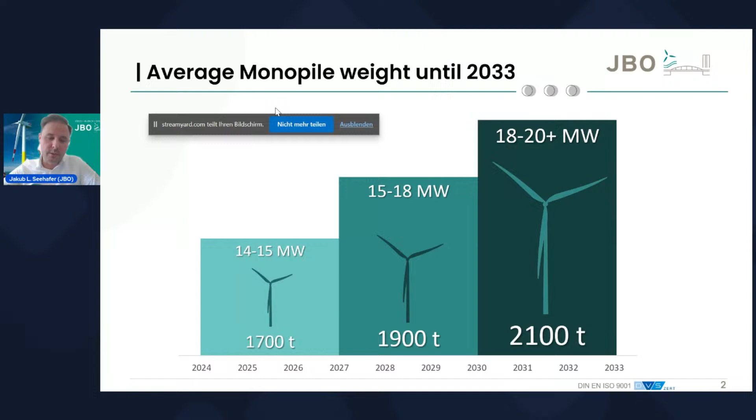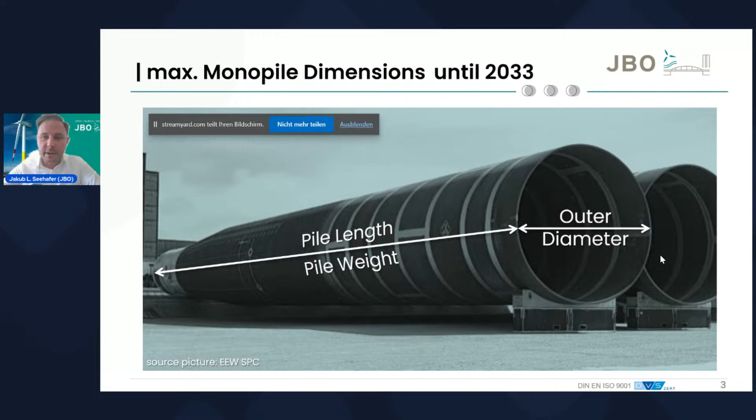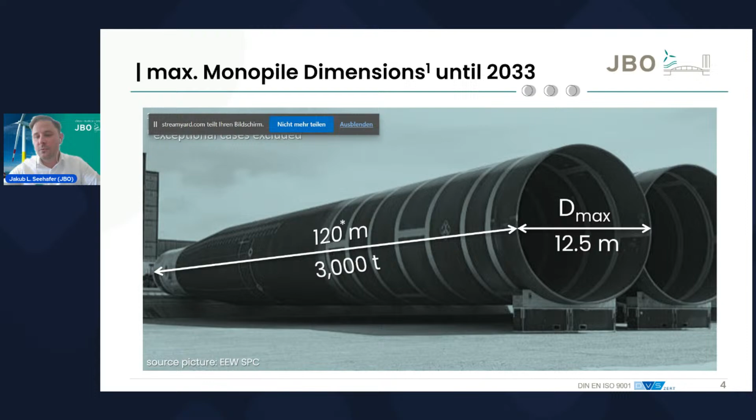When talking about the maximum monopile dimensions and figures, we should concentrate on three of them: the maximum outer diameter, the pile weight, and the pile length that we expect to reach until 2033. These are the values that we at JBO see: a maximum outer diameter of 12.5 meters, a maximum weight of up to 3,000 tons, and a maximum length of 120 meters that we expect to observe and reach by 2033. So far for the dimensions.

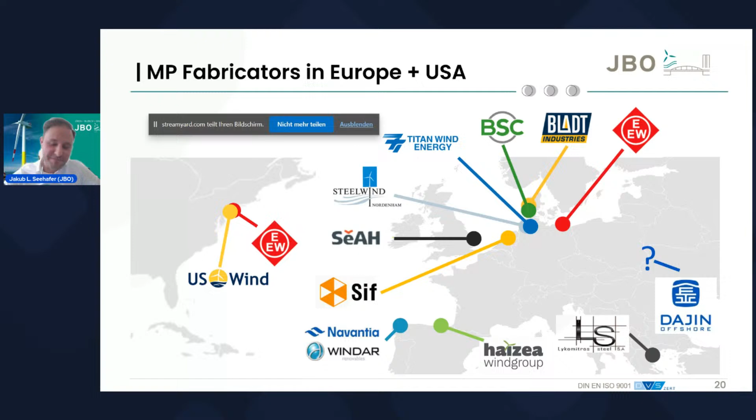Something that we at JBO have considered here is the average weight for the output of those foundations. As the fabricators usually give out their fabrication capacity in steel ton per year, and as we are here dealing with the output rate of monopiles per year, we have specifically for each and every year considered the average monopile weight that we expect to reach.

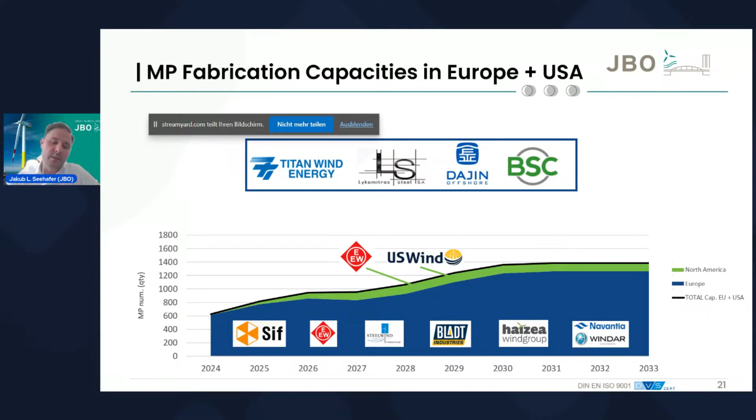So if we would have not done that, the capacity curve would be even higher, which we do not see as realistic when considering this average weight of monopile foundations. In other words, the heavier the monopile average weight becomes, the less the output rate at the fabricator. And this has been considered here in the study already.

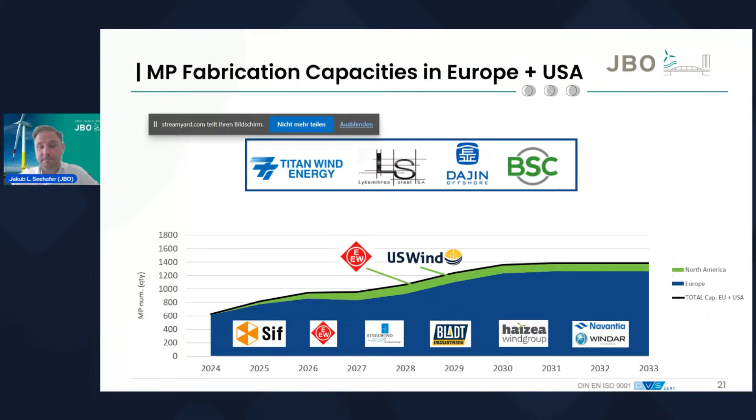Now, you're curious about the capacity versus demand curve. This is something I was also excited about to see, and this is the result.

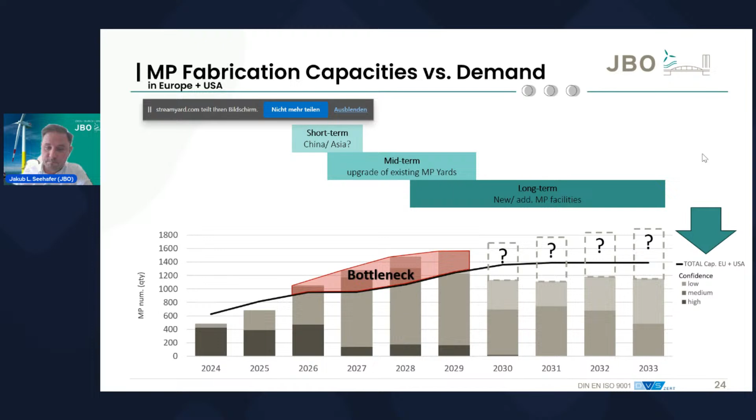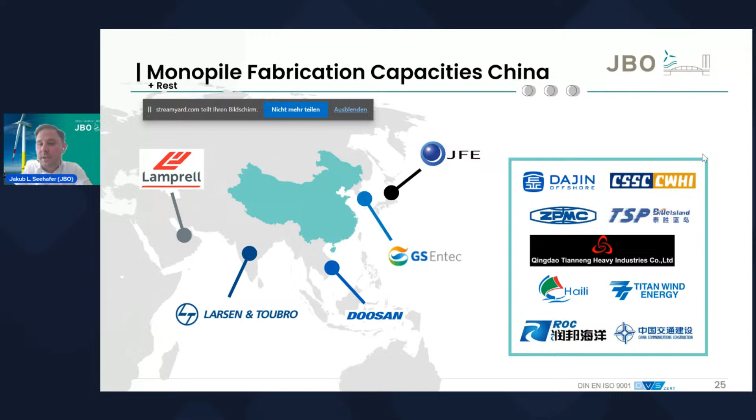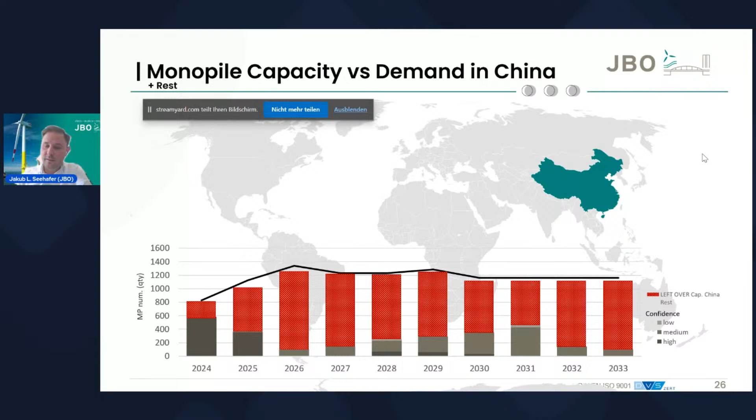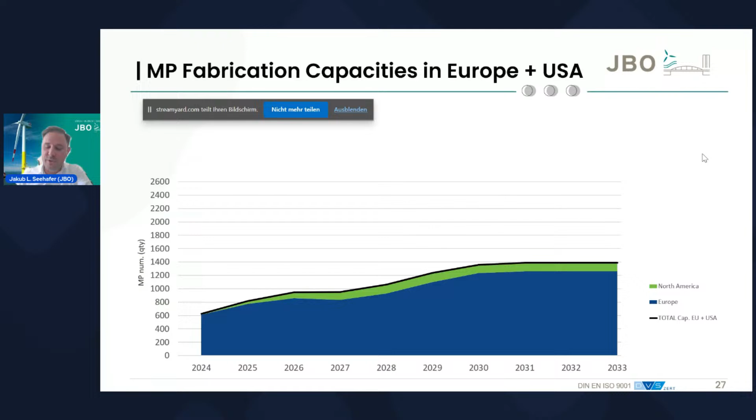Now you're curious how this diagram would then look covering the European and US American capacity, and adding the export capacity, the potential export capacity of China and the Far East fabricators. Now, this is how this diagram would then look. Since the gaps are different specifically for each year, this diagram looks, let's say, different.

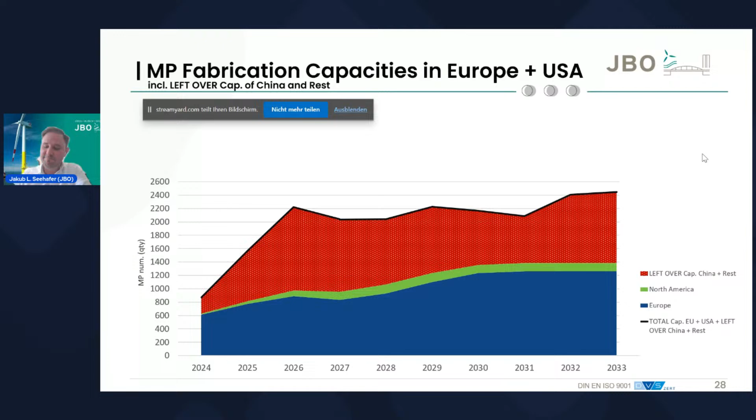Now, if we put this maximum trend line onto our demands for fabrication worldwide, except for China, considering the export capacity of China, we can clearly identify that we have mitigated the bottleneck that we identified before when not considering the fabrication capacity in the Far East, even if we consider a higher demand for fabrication from 2030 on.

This is the kind of conclusion that we can draw from this slide. My recommendation to the market is important, actually. What I really recommend is to be on time. All these values, all these characteristics of this diagram, cover and consider the current and past press releases of the fabricators.

So if there is one in the audience, please be on time. Please make sure that your capacity will be available to the market, because the market obviously needs you.

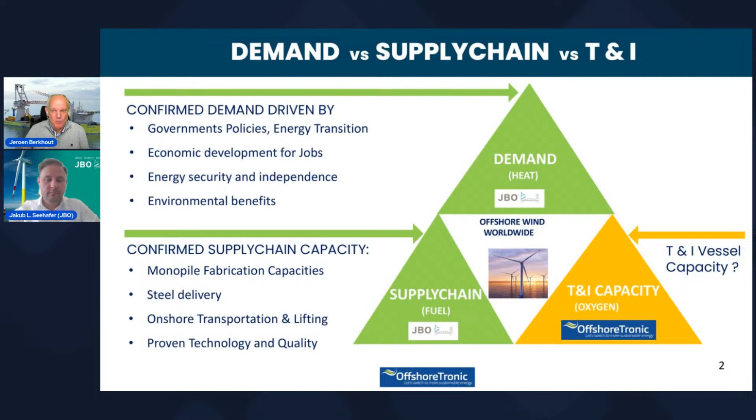Today we'll go and have a look on the right side, bottom end—that's the transport and installation capacity, to see how we are in that area. And you will probably be a little bit surprised, and hopefully people won't get shocked.

Before we start to dive into all the numbers, we want to highlight that we have tried to come up with a really transparent outlook. To come up with this transparent outlook, we used a lot of data available privately and publicly, and we have tried to verify this as well. So in the bottom line we've put whether it's a prediction or an assumption, we will highlight it.

What's important to highlight now is that we are looking only at the European, US, and Asian markets, excluding China, because the vessels from China—we don't believe they will be entering other markets. So for now, we have excluded China in this report.

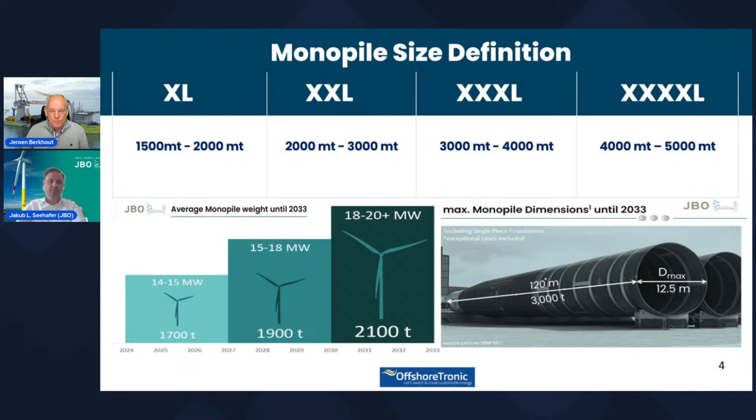What type of vessels are used? Right now we see four types of vessels assigned to offshore installation. First, the monohull vessels. Right now four units are in operation, and we see that as the most efficient T&I solution on the market. There are some more vessels from oil and gas, but we don't see them as really compatible for the larger monopiles, and they're also not operating as such right now.

Jackup vessels are filling in a bit of a gap left over by the monohull units. So some operators with these large jackup vessels have equipped them with mission equipment to install monopiles.

Right now there's also a semi-submersible unit that's been converted for the installation of monopiles. These vessels are extremely costly to operate and run, with high fuel consumption, but as there is a shortage of vessels, this operator has stepped in and is offering their vessel for monopile installation as well.

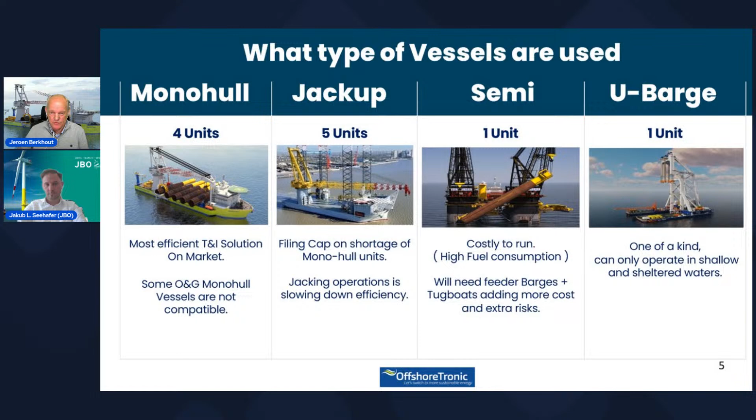Another vessel that's a bit one of a kind is the U-barge. The name of the vessel is Svanen, from Van Oord in the Netherlands. It's a vessel that can operate in shallow and sheltered waters. We included it because the vessel is getting a large upgrade right now, so we took it into the report as well.

If we look at the overview of the vessels operating, and maybe we missed one, let us know, but we believe we have a good overview. We know one monohull vessel operating in Taiwan is not on the list, because that vessel cannot safely operate with monopiles bigger than 1,500 tons. That's why it's not shown on this graph.

Right now we see four monohull vessels operating: two in the US and two in Europe. Shortly, one of the jackups is also going to operate in Taiwan, and that's the Blue Wind. There are some other jackup vessels operating with smaller monopiles below 1,500 tons, but we didn't take them into account because they will be phased out very quickly.

In the coming years there are also some new building vessels, mainly jackups, coming to market, and it's very difficult to pinpoint exactly when they're coming, because there's always a risk of delivery delay with the shipyards, transit time from China, and installation of the mission equipment can take some additional delay. But we have listed them down here.

If we go to the right, in 2027 we have one vessel, a monohull vessel, that is a project under the umbrella of OffshoreTronic. We are the project developers for that vessel, but it's still to be confirmed if this vessel will actually come. It is prepared though, and it could be an option to get that vessel online in 2027. It's a conversion, not a new build vessel, so there's a shorter lead time. Hopefully we can get that online in 2027.

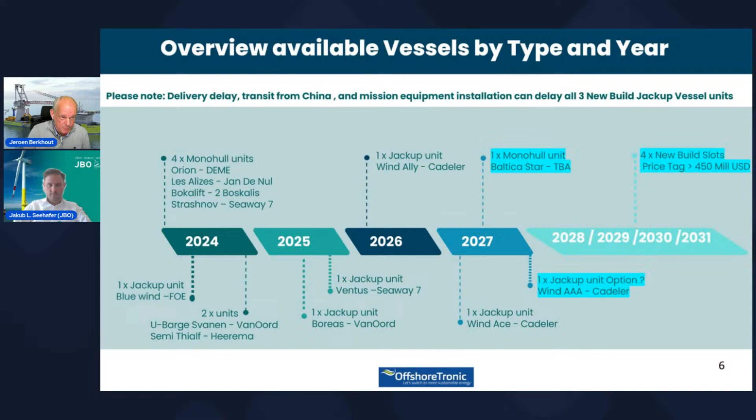There's also an option for an additional jackup vessel shown here. It's not clear if this option will be executed, but we put it on the list as well. And then there are new building slots mainly in China, but the price tags are extremely high, and so far we haven't seen any confirmation that somebody is ordering a new vessel.

The next slide gives a bit of an overview of all the vessels, and we have given the vessels a competitive score as well. This score is based mainly on efficiency, capacity, emissions, day rates, and the safety risk of these vessels. If you score 100%, you have one of the best vessels on the market, basically the best vessel that we see.

Some vessels are a little bit lower in score, and that has to do with the day rate or the emissions, and also the capabilities of the vessel and the amount of monopiles they can transport. On the right side of this slide, we have a number, and that's the optimum monopile per year number that this vessel can produce or install.

That's a number we see if the vessel is doing a normal season without too many operational issues, downtime, or maintenance periods, but also considering mobilization from Europe to the US or vice versa. It's an optimum number that could be 10% higher or lower, but it's what we feel should be optimum for that vessel to install the amount of monopiles. This is a competitive score for monopiles between 1500 and 2000.

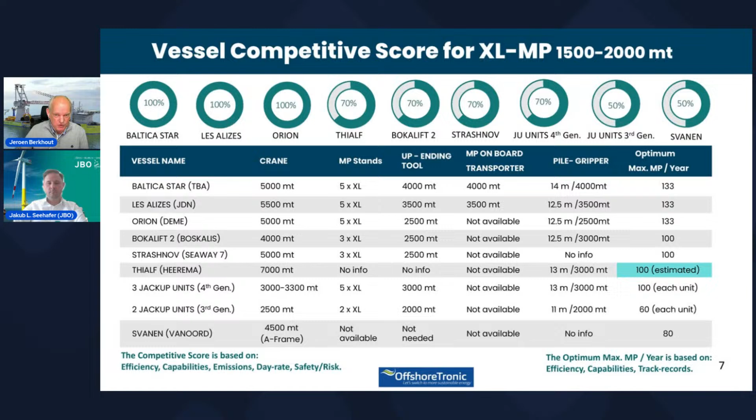You can see also in the first slide we had 5 jackups. Let me go back quickly. Here we have 5 jackups, but the 2 smaller jackups from the second or third generation only have a maximum installation capacity of 2000. So in the next slide, as we go back to the 2000, 3000, the dual XL monopiles, you can see that they are already obsolete for installing these larger monopiles.

We also have a new vessel on the market with no track record - the Thialf from the company Heerema from the Netherlands. That's the large semi-submersible vessel that will start installing monopiles this year. We have no track record of that vessel yet, and it depends on how their operations go. The vessel will be operating on its own offshore, with feeder barges and tugboats bringing the monopiles offshore. But we estimate more or less 100 monopiles in one season if everything goes well.

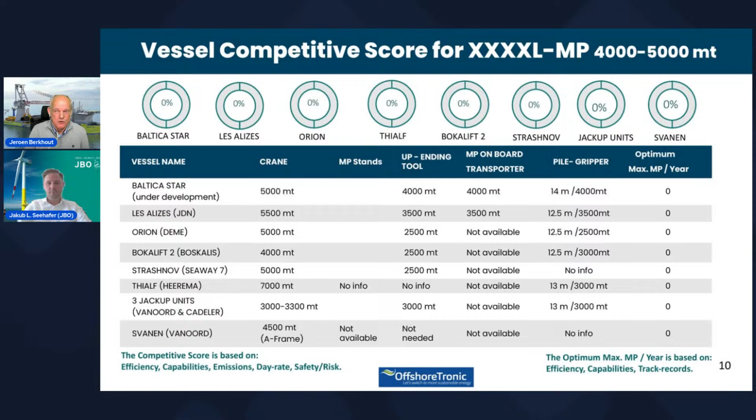Let me go quickly to the next one - that's the quadruple. We don't see any requirements in this area yet. There are some rumors in Taiwan that they're looking at monopiles over 4,000, but this is a very niche market, and it's also probably very difficult to produce. We heard some rumors that in China they may be able to build these monopiles, but so far there is no real evidence or information we can refer to.

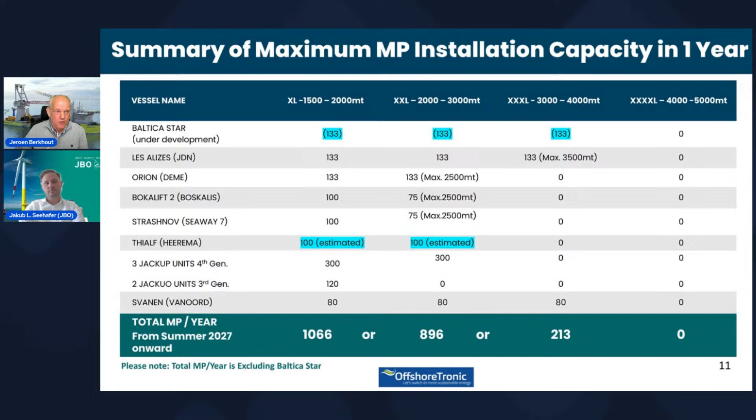If we make a summary of the last 4 slides, we can see a number per year that those vessels can install, divided into the XL monopiles, dual XL, triple XL, and quadruple. You need to understand - and I hope everybody understands what we put on the slide - that if vessels are operating in one segment, they cannot of course operate at the same time in another segment.

So now we come to the numbers. We get a lot of numbers here on this screen, but there's no need to look at this closely because we made a nice graph. This is just an overview - at the top you can see in green the optimum capacity of monopile installation for vessels in the different segments. Then we see the numbers from JBO, the confident market demands, and the total of that. We've also taken the total fabrication from the JBO report, and then we can draw some conclusions.

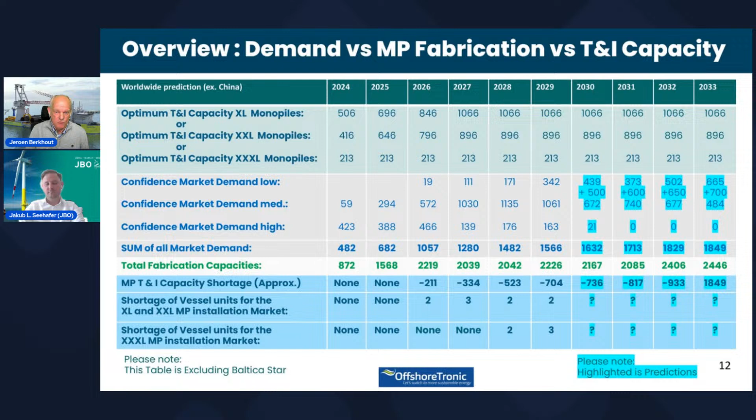And then we see in the blue highlighted boxes underneath in the columns, the numbers in 2026, 2027, we get a shortage of vessels. It's better maybe we jump to this chart that gives a better overview.

So to explain the lines, we have the top line, that's the fabrication capabilities from Europe, Asia, and US, plus the leftovers from China. We also have the line for wind turbine generators, multiplied by 10 kilowatt. So when the output of the turbines goes up, the size of the turbine requires bigger foundations. These are the lines we've taken from the report from JBO. And the yellow line is the vessels that are available.

And then at the bottom we have put the numbers, so you can see clearly already from 2026 there is a shortage. It's also interesting to highlight that the red line was given as the bottleneck, and that's the fabrication between Europe, Asia, and US.

And what we understand also from Jakub, from some discussions, is that monopiles basically from China will be transported and used in Europe, and some monopiles fabricated in Europe are going to the US area. So there's a lot of demand on the heavy lift transport vessels to cope with all this transport.

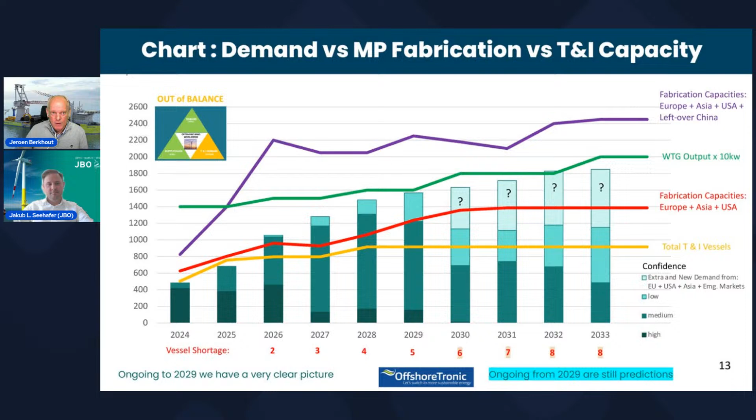Right now we are installing wind turbines between 14 and 15 megawatts, but slowly we will go to 18, 20, 22, 24. So we made a scenario and a prediction on the worst case, what can happen with the evolution of the wind turbine. That will also affect the monopile, especially monopile weight in combination with deeper water.

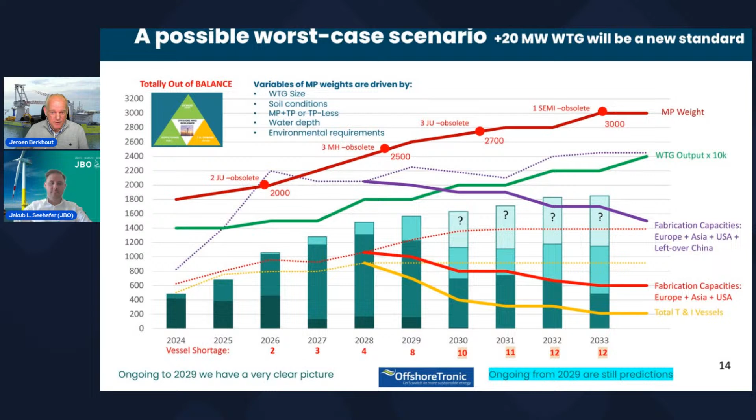You can watch it. So this worst case scenario could also have a huge snowball effect in the whole industry. And we have given here some examples of what can initiate this snowball, such as insufficient monopile installation vessels. These are not very remote examples; they are examples that are coming in the next 3 or 4 years.

If you have a monopile with a separate transition piece, we already see in projects around 60-70 meters water depth, the monopile will be above 2,700 tonnes. So there are quite a lot of vessels that are not able to cope with this.

We also see an example of a TP-less monopile for a 15 megawatt wind turbine in 50+ meter water, and that's already giving problems and headaches for some contractors. There's also a situation with a monopile of 2,500 tonnes for an 18 megawatt turbine that is in the planning.

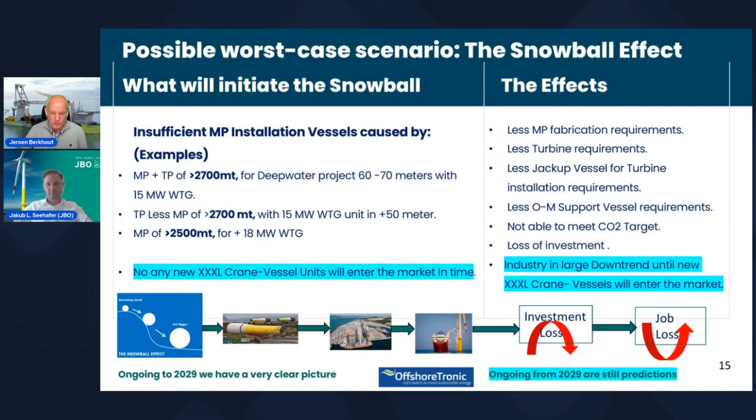So at the bottom we have made a small animation showing that the snowball will start with the foundations being key, and in combination with the vessels, it will have a snowball effect on the rest of the industry. The challenges -

What can increase the vessel demand? We have a good overview of what we have and what the capabilities are of the vessels working right now, and what will be available in the coming years. But what can give an extra increase in vessel demand?

It's the O&G, the oil and gas sector. If there are more projects coming online there, in combination with decommissioning, maybe the day rates and conditions are better for the contractor. So maybe one or two vessels will step into that area, and then the total output for offshore wind will go down.

There is also a risk of faster growth in offshore wind in general, mainly in Asia, developing markets and emerging markets like India, Brazil, and other areas. Colombia could be a new hotspot as well for offshore wind.

There could also be an improved monopile and transition piece combination, with new solutions allowing for split lift. But the transition pieces are getting really heavy then. That means the same vessels need to install a monopile and additionally have a big lift and a big work scope on the transition piece, which could give more demand on this type of crane vessel.

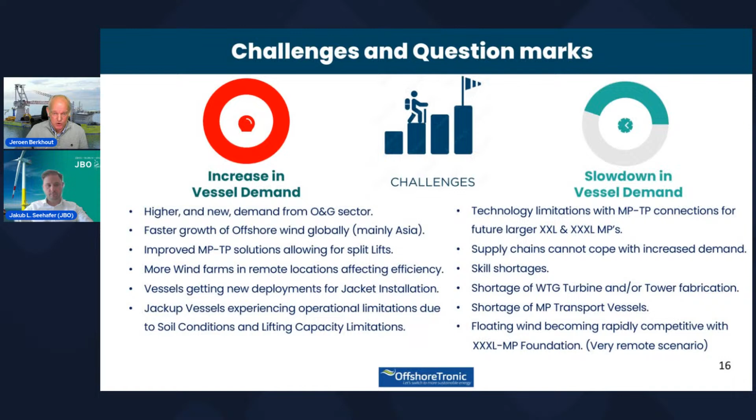And then also floating wind at one point, if that makes big developments, could be competitive to the triple XL monopiles, because there's a lot of weight and a lot of steel in there.

So, solutions - long-term and short-term solutions. If we start with the short-term, top of the list is of course more vessels, and we should start to think about this now.

There's a lot of operators already looking at this for a couple of years, but they are not pulling the trigger. We definitely need more vessels in the range of 3,000 to 4,000 metric tons. There are also some talks, even in government and in Europe, with the European Commission, to cap the evolution of the wind turbines at around 18 or 20 megawatts. But as we see the market right now, maybe the market will adjust by itself. If there are no more bigger vessels coming to the market, you're not able to install the monopile, so we have to adapt there.

The operators and wind farm developers have to make a decision then to stick with the smaller turbines. There is also a lot of research going into reducing the weight of the monopiles, which could also have a positive effect.

There are also some companies looking at upgrading their jackup vessels for monopile installation, but it will come with some cost. And also, is the time enough to step into this market before your vessel gets obsolete, because the turbines and monopiles are going quite big in size.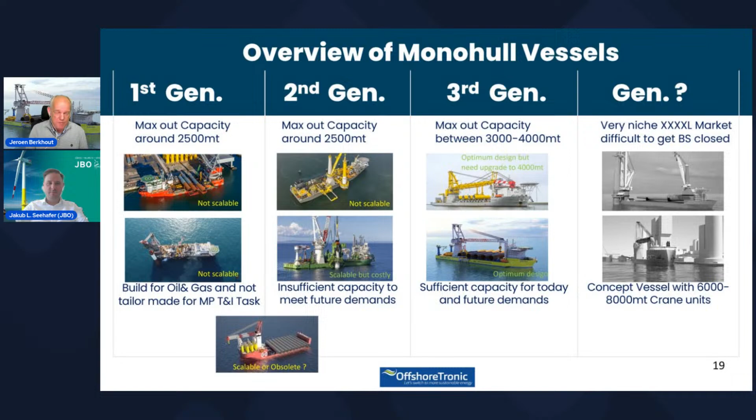I see we're frozen. Let's see what's happening. Yeah? I can hear you clearly, Jeroen. Yeah, I have a frozen screen, I cannot move the slide. Let me see what is happening with my computer right now. As always, let me check. Jakub, you still there? Yes, I am still there, I can hear you clearly, Jeroen. Yeah, okay, I cannot, you can hear me clearly, but I cannot. And now you switched over to slide number 19, so the audience can see that. Okay, thank you, then I will open on another screen my presentation. It's always happening, we are working with computers and always something is happening. Let me open up, there, okay, I can see myself again. But you can still hear me, Jakub? Yes I can, yeah, okay. Yes I can, okay, let's go back to the long term. I can see, I can only not see myself, but that's okay.

So we see the long term is again about the wind turbines. We need to try to come up with a solution there, because it will affect the whole industry at the end of the day.

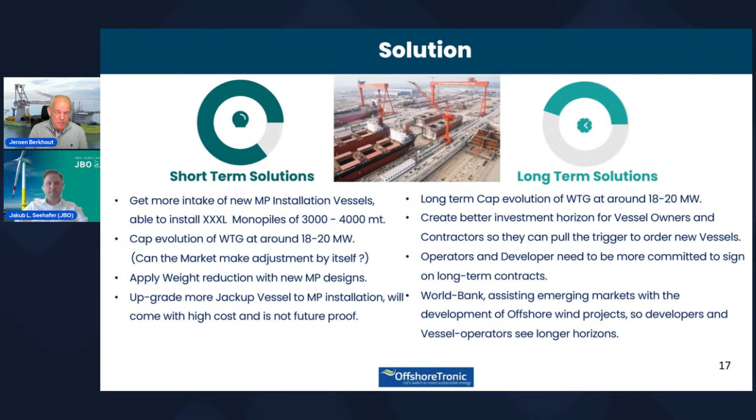Also better investment horizon for the vessel owners, so they see a longer horizon to invest in these vessels. Also, the World Bank is getting involved right now to support projects in emerging markets. That could be worldwide, even in Africa and other parts of the world, where the World Bank is maybe investing in new projects. If we see more of these projects coming, there will be investors stepping in, and also vessel owners and shipping owners coming with more vessels.

If we draw some conclusions from the data that we went over quickly over the last 15 minutes, we see there... I think we also go in a little bit of extension of the webinar. I hope everybody can stay online.

We have a video that can show you what we believe is an optimum vessel. Right now there are two vessels that we see as optimum vessels, and that's the vessel from Jan de Nul, the Les Alizés, and the Baltica Star. Those are vessels that can operate with 3,000 to 4,000 ton, 120 meter long monopiles.

They are transport vessels as well, with a large and flexible transportation capacity. They're floating vessels, and also I think the optimum vessel should have a very low environmental impact and fuel consumption. Fast mobilization and transit speed is a plus, and if you can pass the Suez Canal or enter the Baltic Sea, that could be a plus as well.

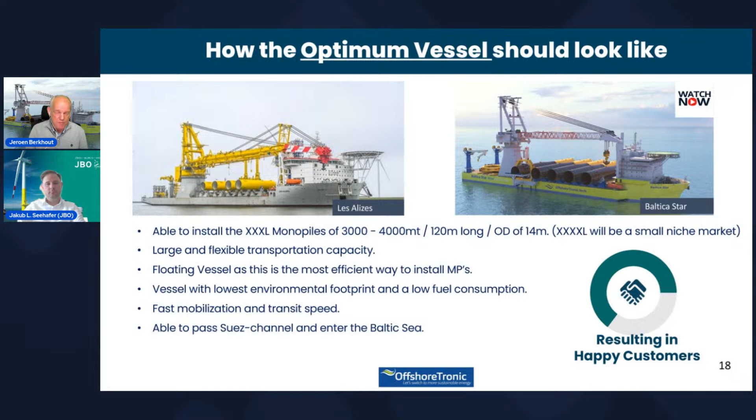Let me start a video. More than 80% of all offshore wind turbine installations will be using monopiles as a foundation.

Sorry, can you see this video? No? Okay, well, I will reload it. Something is going wrong, but hopefully we can work around it. Let's see if we can open it this way.

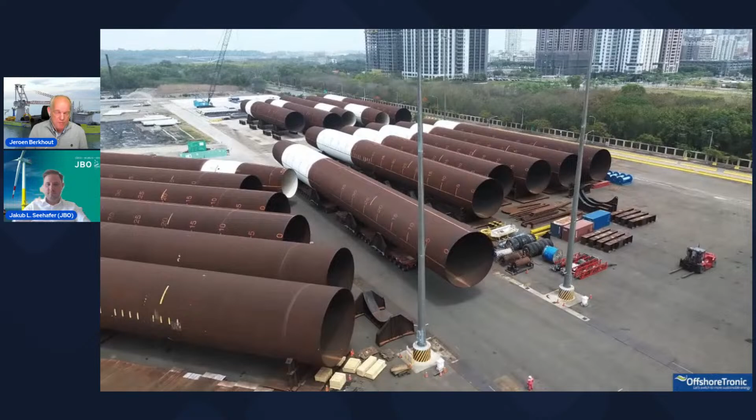Offshore wind energy is expanding rapidly worldwide, and more than 80% of all offshore wind turbine installations will be using monopiles as a foundation. As a result, there is a growing need for monopile installation vessels. Interestingly, this segment of the offshore wind market is the most underordered within the industry. With this vessel shortage will come also new opportunities.

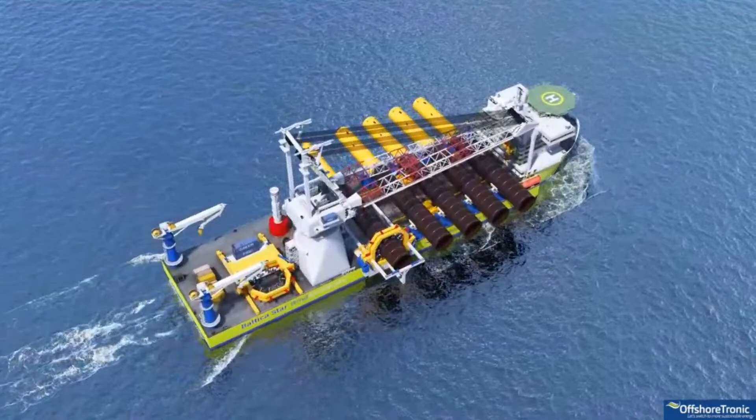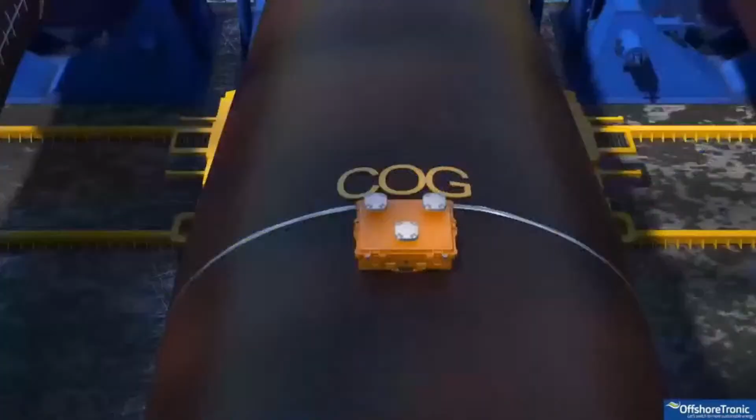Let's have a closer look at a new vessel Offshoretronic, a marine engineering company from Barcelona, Spain, have developed with assistance of their technology partners. The new monopile installation vessel is a fast-track solution for the fast-growing offshore wind industry. Let's zoom in to all the enhanced capabilities of the new vessel, called the Baltica Star.

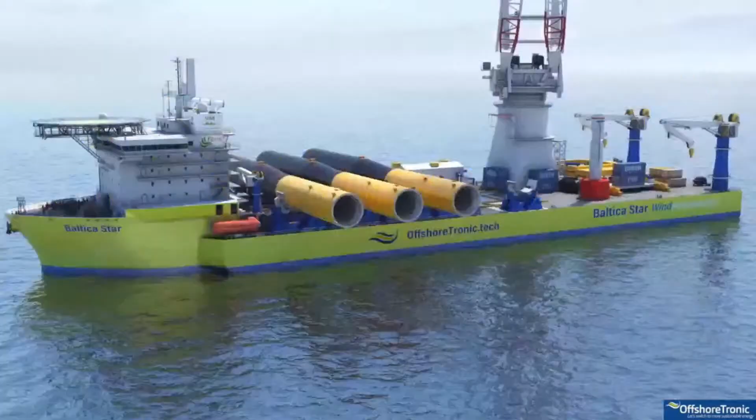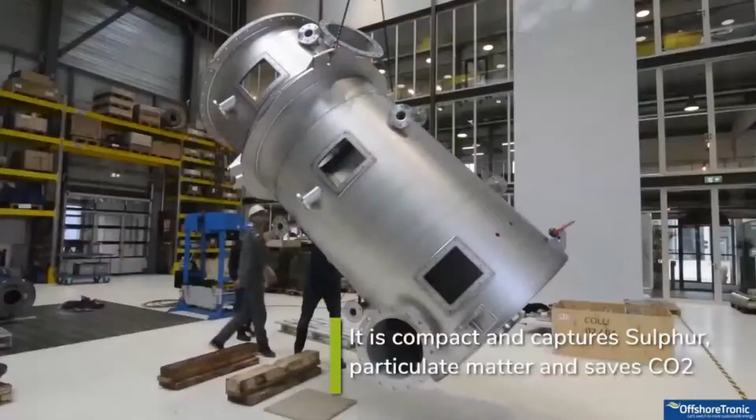The vessel will be equipped with a next-generation EGCS filtration system with innovative technology that filters sulfur, CO2, and 99% of ultrafine particulate matter. With the CO2 capture capabilities, the Baltica Star will have the cleanest environmental footprint within the whole fleet of heavy-lift crane vessels.

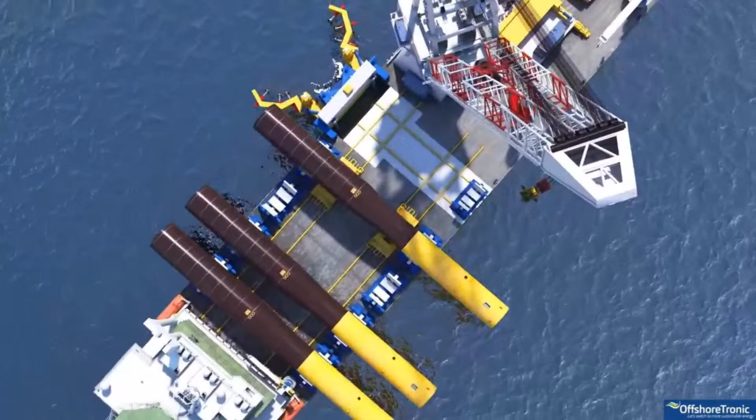The next enhanced feature is the fully automated monopile transport system, allowing for safe transportation without the use of the main crane. This will allow for large time saving and dual operation when the main crane unit is assigned with other tasks. The transporters are also fully integrated with the automation of the ballast and anti-heel systems to keep the vessel trimmed at all conditions.

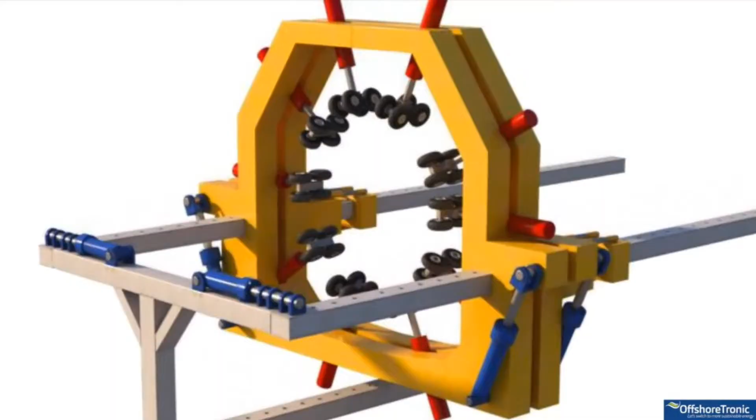The vessel comes also with an enhanced capability for upending and lifting monopiles up to 4,000 metric tons. The gripper/tensioner is designed to handle a range of monopile sizes. To allow manipulating of the monopile quickly and safely from horizontal to vertical, OffshoreTronic has developed a unique upending table that is fully incorporated in the vessel's hull.

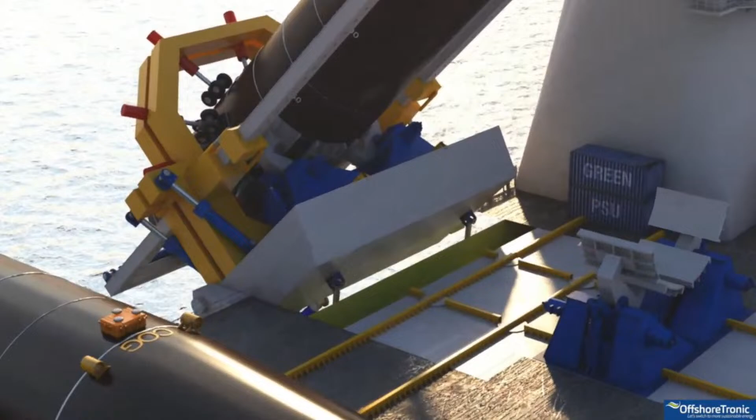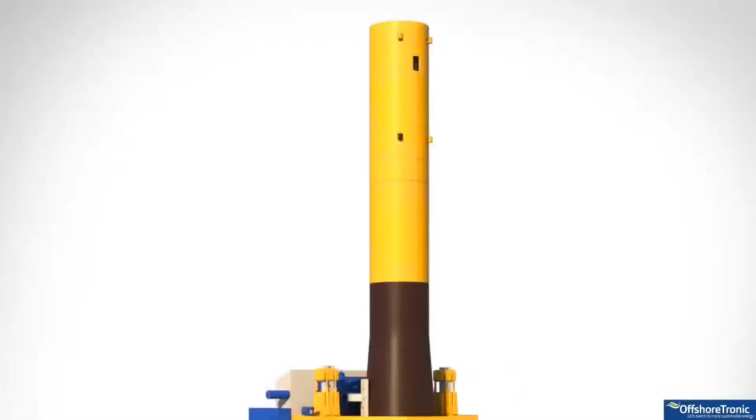This design will save more than 50% of components that are used on older designs of upending hinges and tools. To prevent plastic deformation and bending of the monopile during the upending process, we support the monopile, which can reach up to 120 meters long and with a diameter of maximum 14 meters, at 3 points.

At the center of gravity area of the monopile, a special design saddle will be in line with the pivot point of the upending table and will handle most of the load. The monopile gets additional support from the gripper/tensioners, which will safeguard that the monopile stays in the support saddle when entering the splash zone during the upending process.

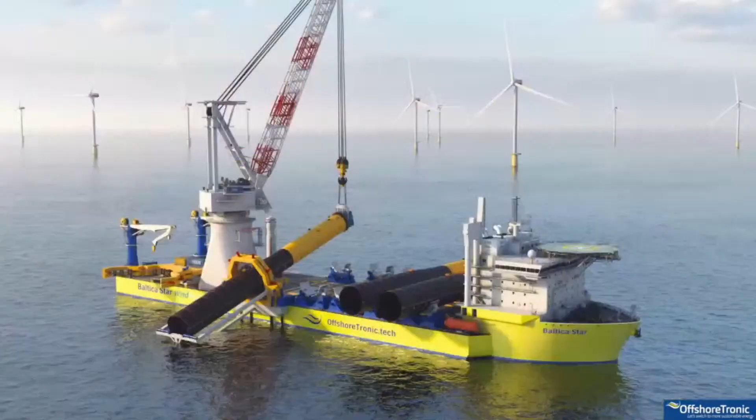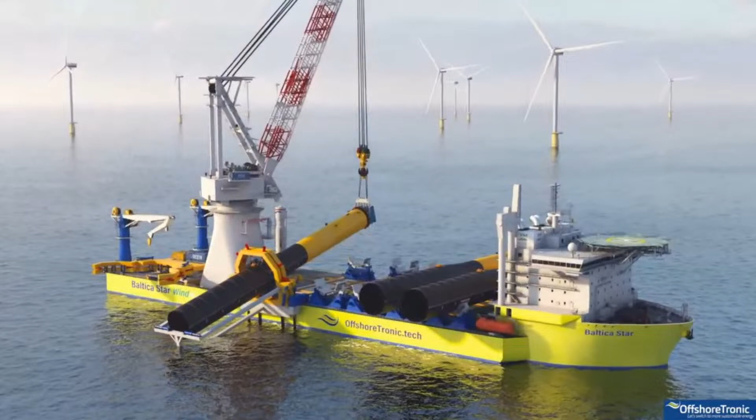The bottom end of the monopile will be supported in a shoe that is supported by the 3 outrigging legs. At the top end of the monopile, the main crane will take care of a very smooth lift with very low loads, as we have created a large counterbalance weight at the bottom end.

When entering the splash zone, we will experience some hydrodynamic buoyancy forces from wave slopes or sea currents pushing on the monopile. With our unique setup, we allow for a fully controlled and safe upending process, extending the workability window of the vessel unit.

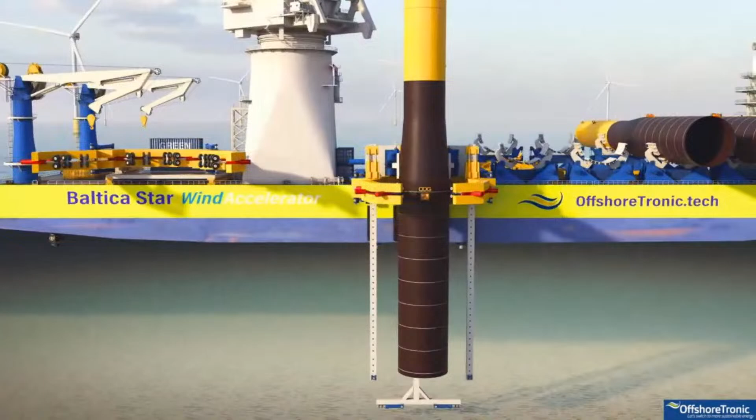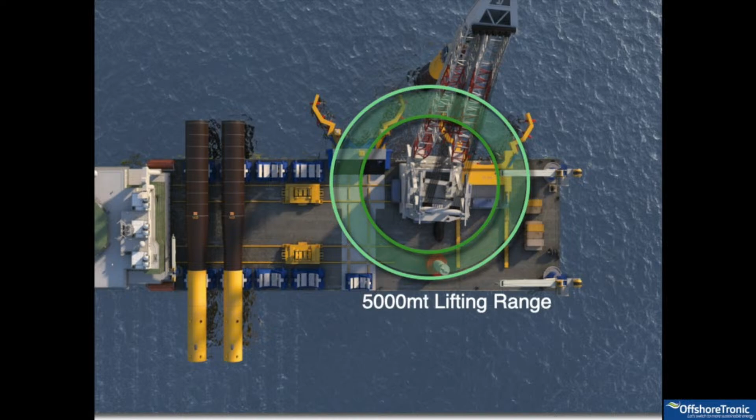Let's now swing over to the motion-compensated pile gripper. During the swing over of the monopile, it will stay well within the 5,000 metric ton lifting range of the main crane unit. This will allow us to lift and transfer monopiles up to 4,000 metric tons in a very safe way. OffshoreTronic engineers have developed a new and more efficient solution to guide monopiles during the installation phase.

The optimized technology applied to this pile gripper will fulfill strict regulations and clients' requirements to keep the pile within an offset angle that shall not go over 0.25 degree. To ensure this, a robust control method is required to deal with massive forces. OffshoreTronic have come up with a new approach and design.

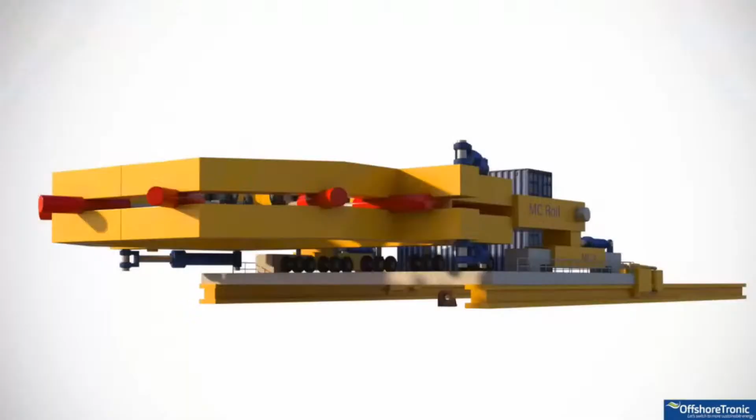The unique gripper has, in addition to other designs, active roll motion compensation. The most significant improvement applied is that the whole weight of the entire gripper is supported by 5 large tire sets with a total of 20 wheels, with a total capacity of around 1,500 metric tons.

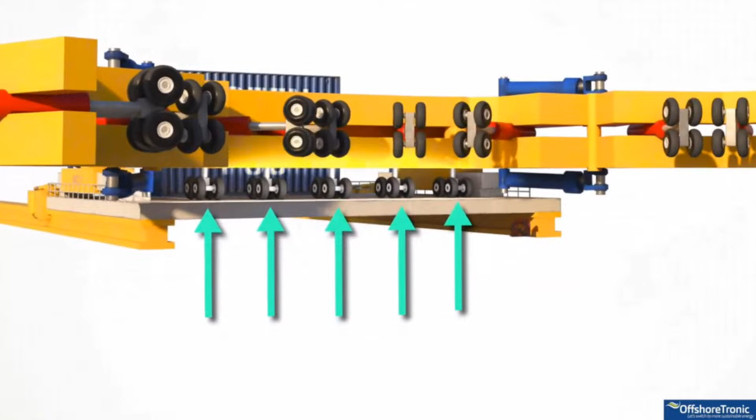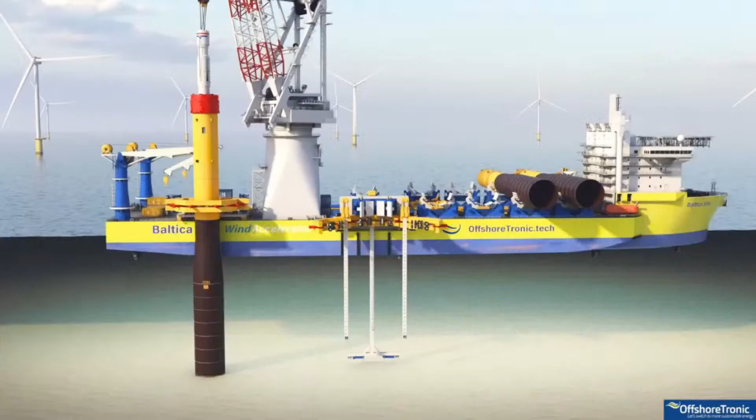The wheel sets are fully integrated in the gripper section with hydraulic cylinders that can also compensate for roll motions of the vessel. The wheel sets also have drive motors to assist with the top hydraulic cylinders to compensate for vessel motion in the Y direction. With this unique setup, we created extremely low friction in the horizontal plane, giving large energy savings to put the gripper in motion.

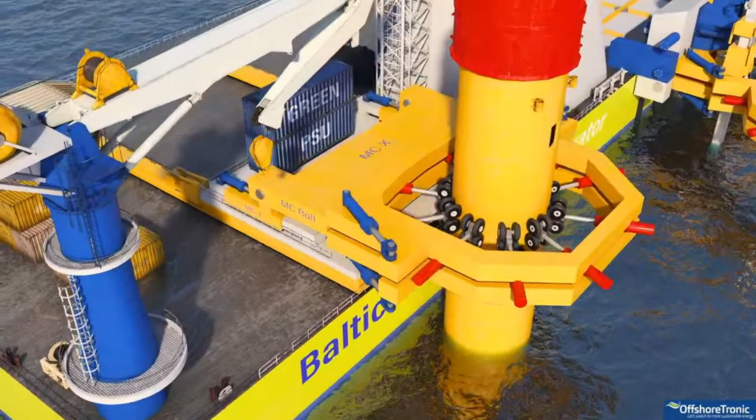With the new innovative approach and solutions, we are able to extend the capacities and maximize the workability with a monopile gripper that will require low construction and maintenance cost. The gripper has no outrigger tilting function, which saves a lot of hydraulic and mechanical components. With the horizontal skidding platform, we also created very easy access to perform maintenance on the gripper and the noise mitigation system, which is an accessory but have for good reasons not been shown in this video animation.

To finish this presentation, we will summarize all the enhanced features the Baltica Star is carrying to be a very successful crane vessel to help and accelerate offshore wind. The vessel has the capacity to transport and install monopiles up to 4,000 metric tons, with a total length of 120 meters and a maximum outer diameter of 14 meters.

The vessel has dual and parallel operational capabilities with a fully automated monopile transporter system that will allow the main crane to carry on with other tasks. Last but not least, the vessel has the ability to capture CO2 emissions and will be the cleanest offshore installation vessel on the market.

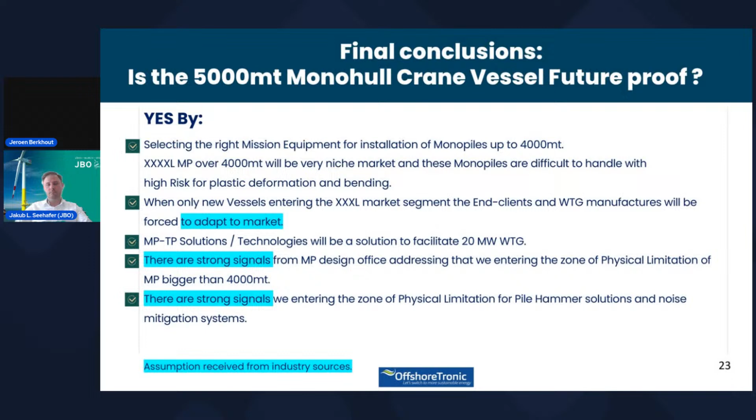I had a few more slides, but I want to skip them for now. I just have my last slide — I hope you can still hear me. We try to keep the spirit high. Even though some of the slides look really dramatic in worst case scenarios, if we keep the spirit high and focus only on what's possible, not on what is impossible, we can keep a healthy market.